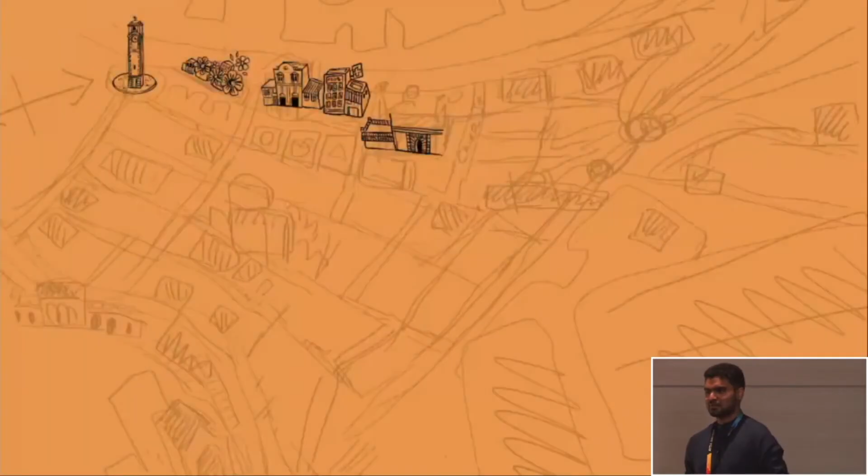Today I want to share a story of hope and possibility from the city I come from, a place called Pettah.

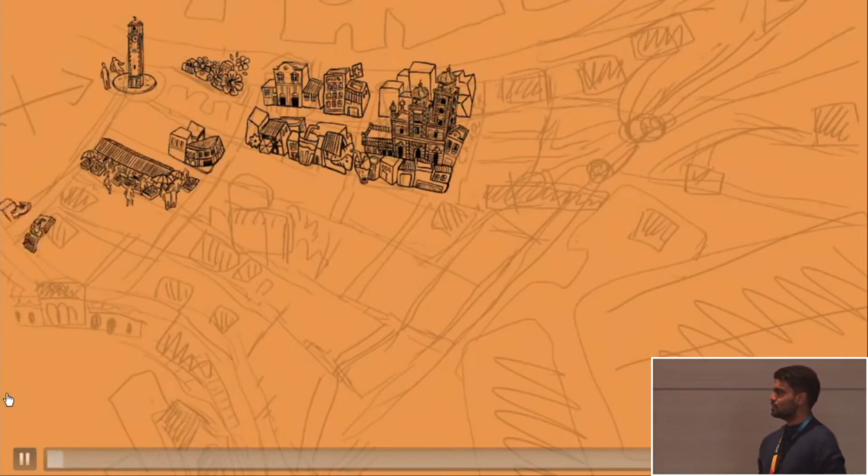Pettah is a vibrant commercial hub in Colombo, Sri Lanka, bustling with energy, a maze of colorful markets. Most importantly, it consists of people of over 20 ethnicities living and weaving through the crowds, which makes this place rich in heritage, culture, and celebration. It's not just a marketplace, it's a living, breathing mosaic of diversity.

But today, this vibrancy is under threat. Markets are being dismantled, and the street vendors, the lifeblood of Pettah, are being displaced to accommodate new developments. The spirit of this city is slowly fading.

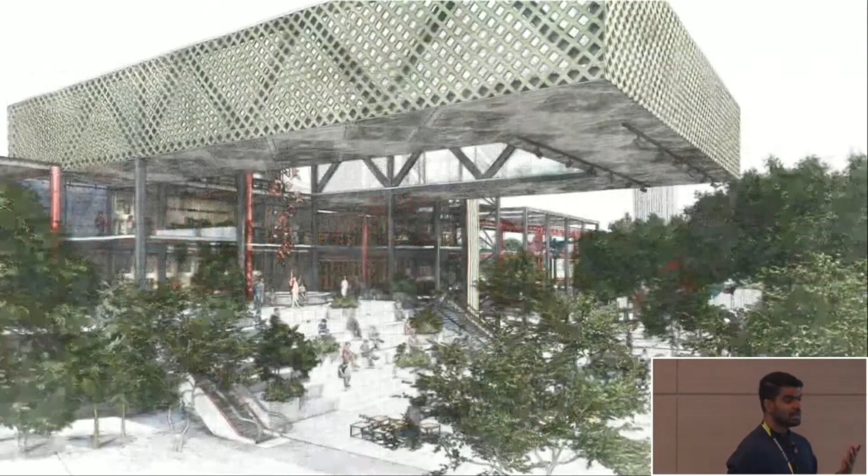So let me introduce you to Pettah Link, a vision where growth does not mean displacement, but a space for everyone, where the formal and informal, old and new, are not pushed apart but thoughtfully integrated.

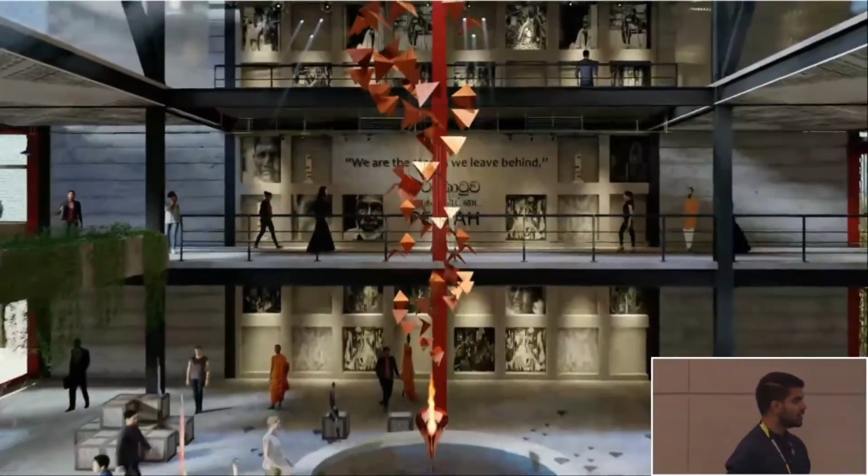3 principles inform this design: social integration to link between different communities, social inclusion to make people feel valued and respected, and social assimilation to allow people to share their aspirations and their identities, all of which are converged through the celebration of the spirit.

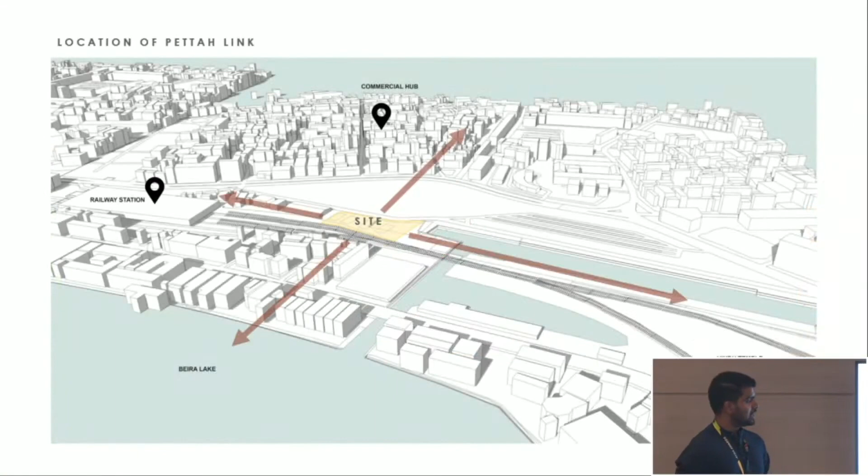The site is an underutilized space which disconnects the commercial hub as well as the lakefront with other transportation hubs and cultural hubs. The spatial movement is informed by the movement of the people itself.

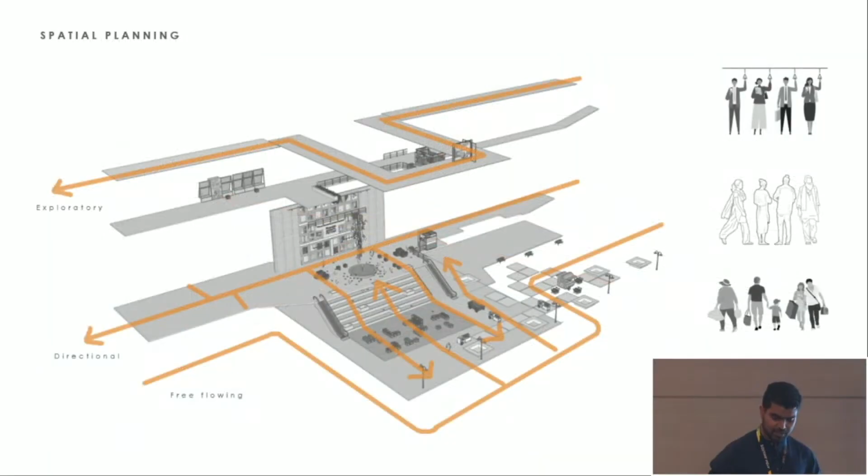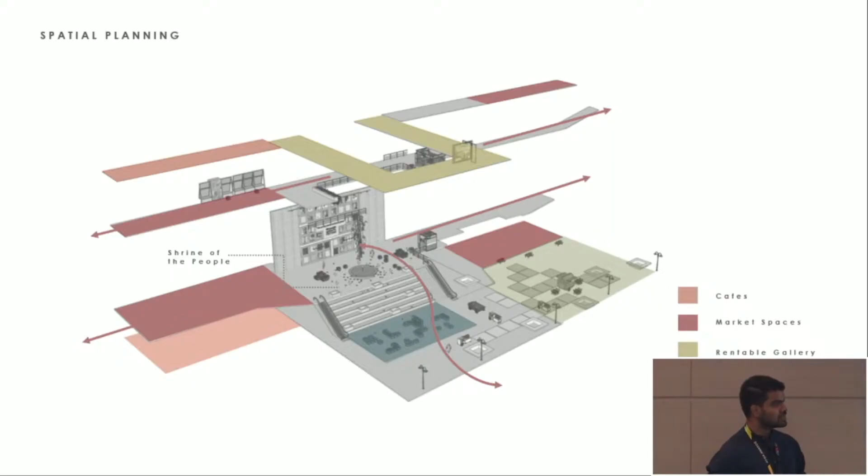To enhance this movement, different functions ranging from commercial activities, gathering spaces, multifunctional spaces, and galleries are introduced, offering diversified activities for multiple users.

And to make people feel familiar within the interior spaces, the theater of the city, or the spirit of the city, has been choreographed into the interior spaces, so it instills a sense of belonging.

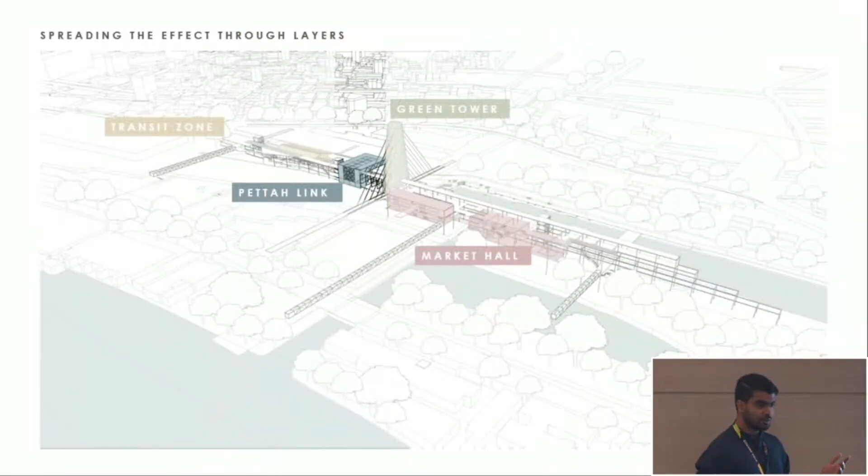And this effect, through layers, is aimed to be dispersed into the surrounding context, with the use of secondary functions such as commercial activities and transitional zones.

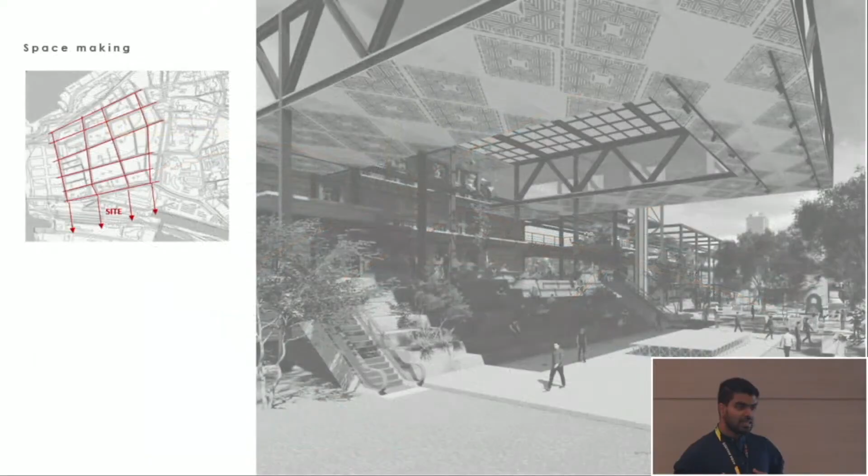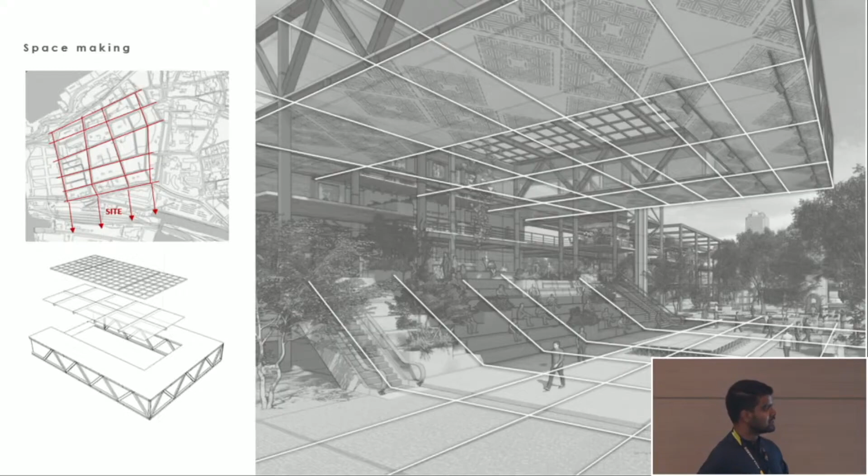The base of the interior design was informed by the historic grid pattern that runs across the Pettah city. This grid pattern was also represented in the transparent ceiling, so that it casts different shadows and allows people to experience this grid nature in different ambiances throughout the day.

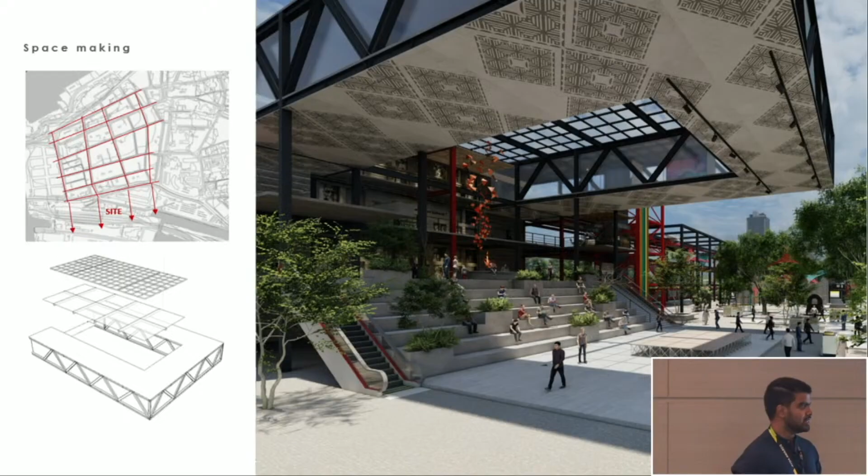Let me take you through the interior spaces. The circulation areas guide people across spaces, and the aim was to bring the street character into the interior space. With the use of stone paving, the aim was to create a connection towards the historic textured pathways of Pettah city, and by using discarded billboards of the market space, a vibrant ceiling has been created, energizing the space.

And the color red has been used to color the steel column and beam structure, which informs directionality and movement to the people.

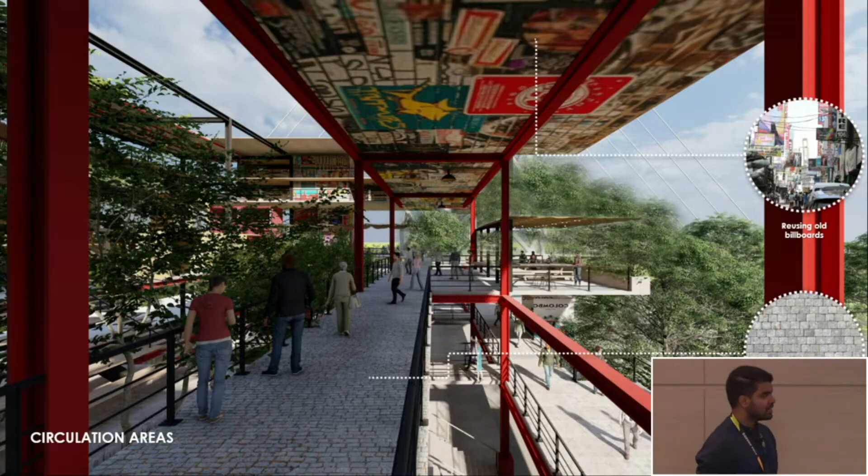And to make these spaces more lively, convertible stalls have been introduced. At one point it is a vendor stall for pop-up markets, and at another time it can be converted into seating. This is a timber frame structure which has upcycled gunny bags coated with Nippon epoxy paint as the covering.

Also the Pettah market energy has been represented through artistic artworks, which brings more vibrancy to the space.

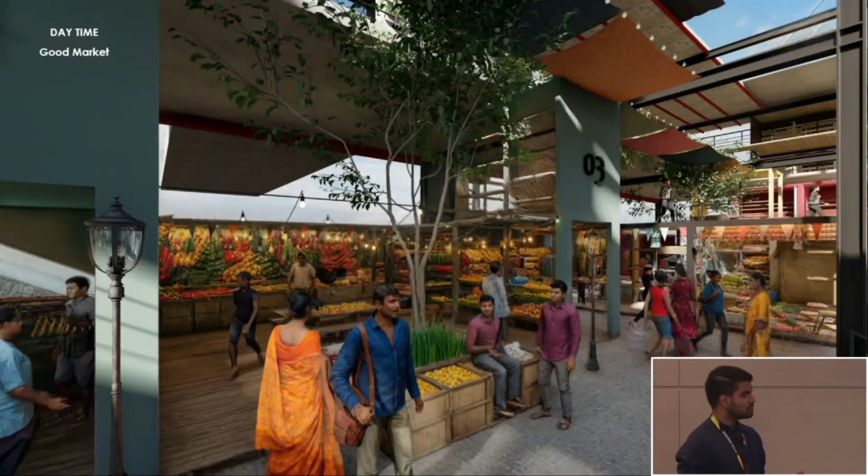Let me take you through the first space, the market space. The market supports and integrates the displaced informal economies.

It consists of 5 modules, making the market a modular market, and the 5 modules allow vendors to promote their products in diversified ways. With the use of 4 vibrant Nippon Paint colors, it follows a clustering of products based on color, bringing the Pettah market energy with colors into the space.

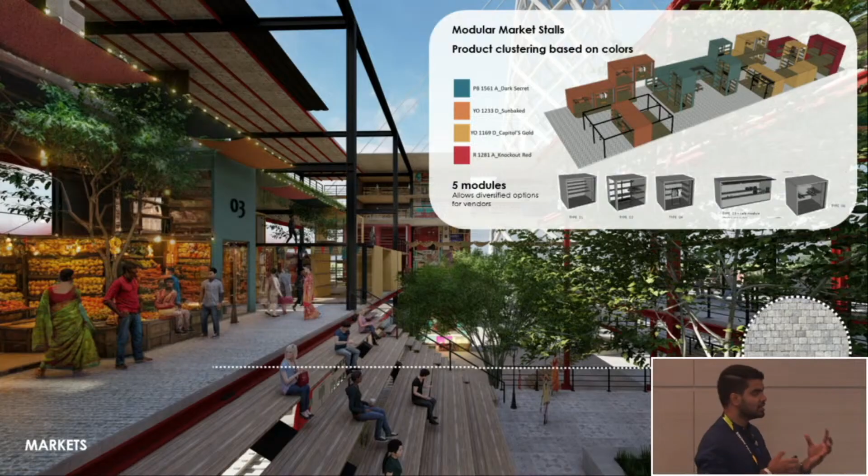During the daytime, this functions as a good market where vendors can come and sell local produce. Packaging boxes are remodeled as seating, and discarded gunny bags are dyed with color and used as vibrant overhangs, bringing a memory of the Pettah market into this space.

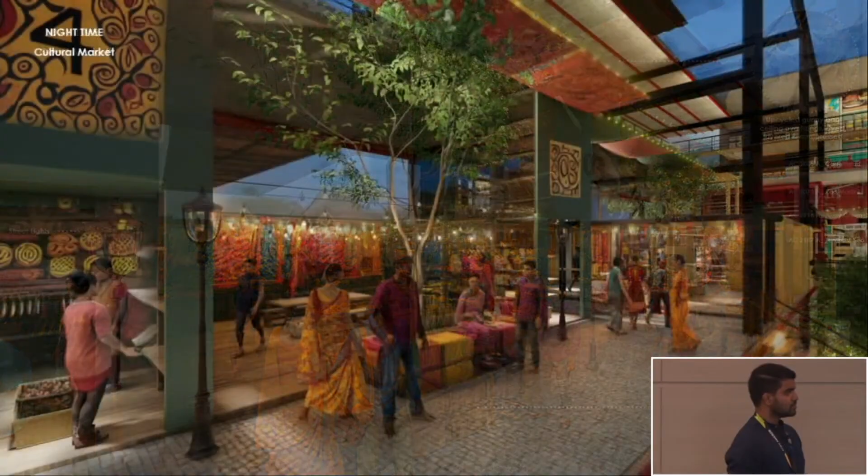And with the use of street lighting and textured pathway, the street character is transformed into the interior space. At night, this transforms into a cultural market where the local community comes to promote their culture through commercial activity, attracting tourists and activating the nightlife of this space.

So next, the gallery space. The gallery space utilizes a light box ceiling with luminous textile panel, which can change the ambience of the interior space to accommodate different community exhibitions.

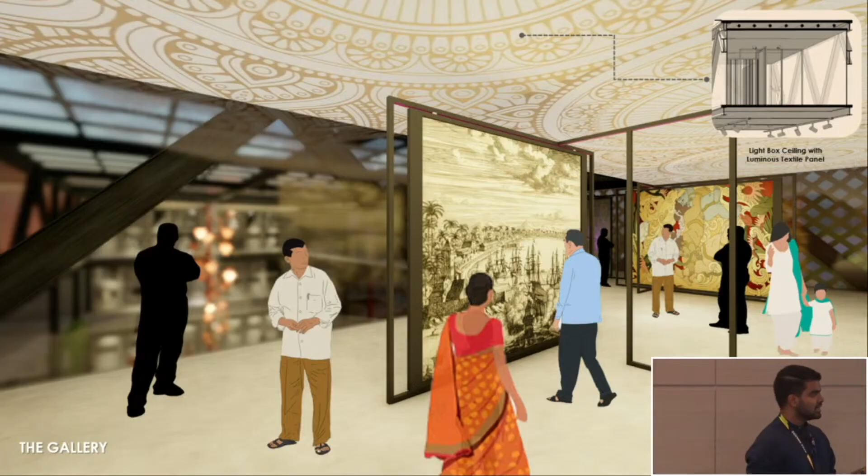And with a screen which filters light into the space, it creates light and shadows within the space to create a dynamic effect in the daytime.

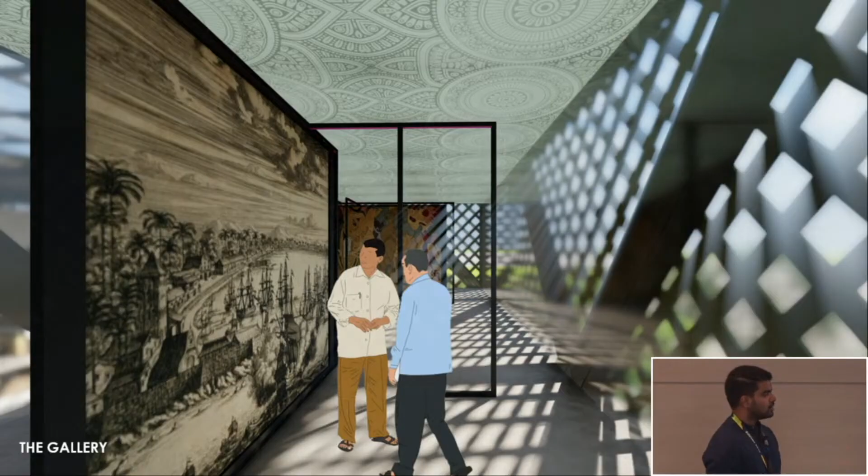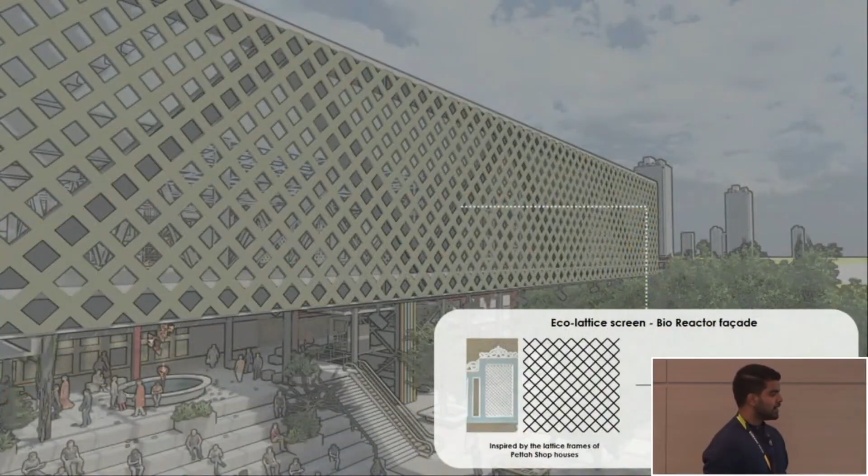And in the night, with the illumination of the light box, you can see the people's movement in a layered format through the screen. This screen was inspired by the historic lattice screens of old shop houses of Pettah.

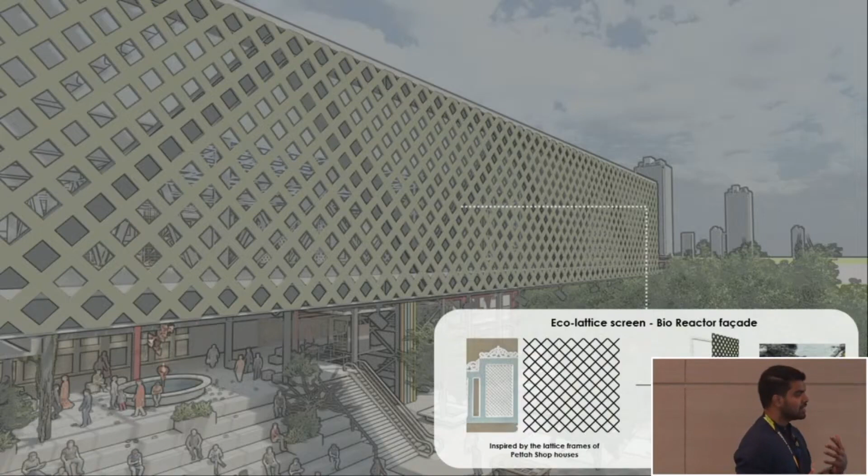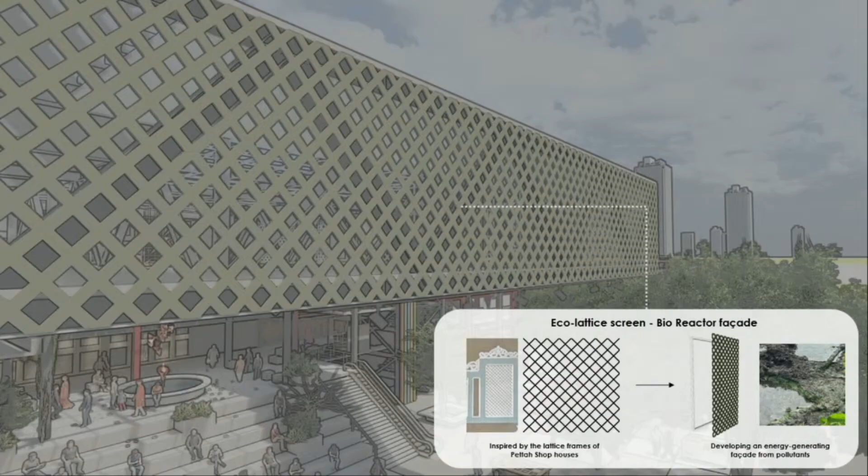Instead of making it a mere screen, it was developed as a bioreactor facade, where the material is a Teflon tubular system that runs the pollutant algae from the lake nearby. This can harness energy with the use of sunlight and generate electricity. So it showcases how a structure, a mere screen, can be given more purpose, and how a negative aspect like a pollutant can be converted into an asset.

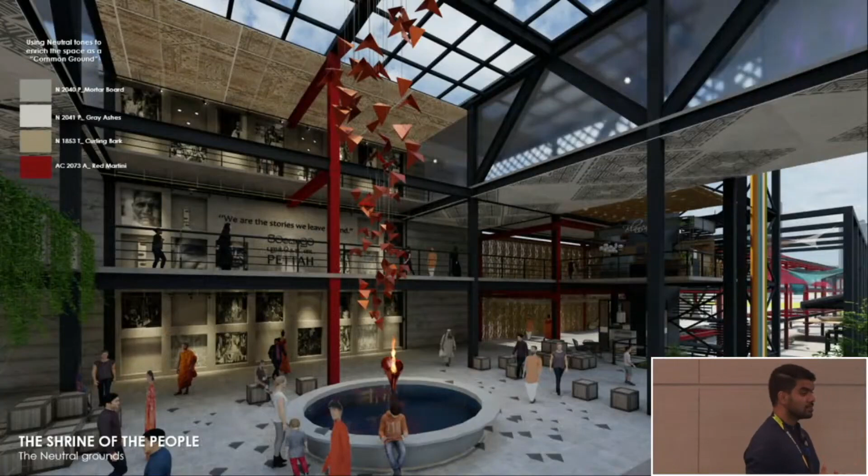So all of these spaces converge into a central space, the shrine of the people, or the common ground. To enhance the nature of the common ground, I have used neutral tones so that it allows the vibrancy of the people's activity to be highlighted. And the central sculpture is the highlight of the space, and the memory wall becomes the backdrop to the space.

So the memory wall is a celebration of the community's history, demonstrating how they grew through their past, through the tragedies and their potentials.

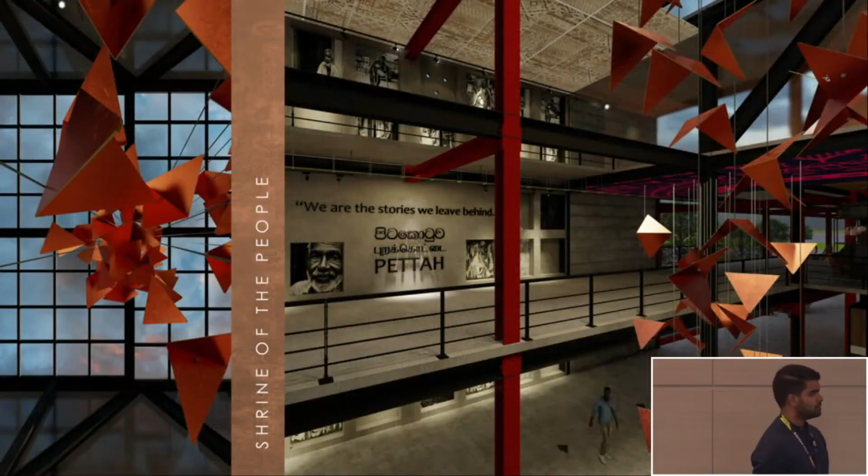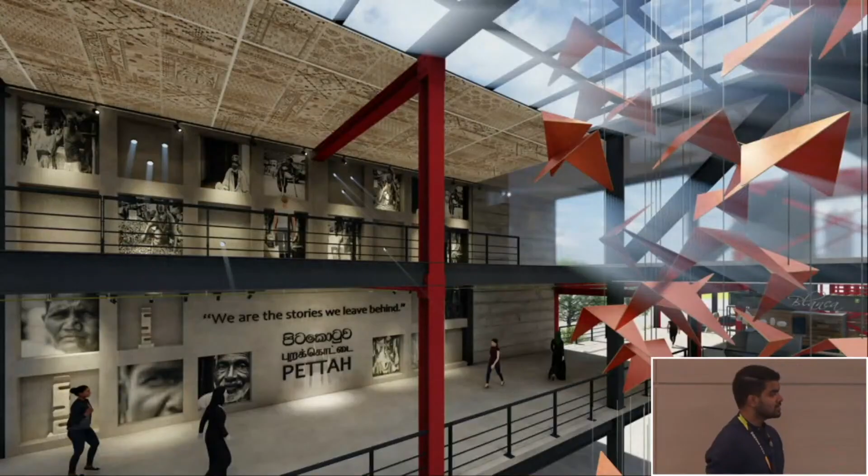And with perforations and pattern ceilings, different ambiances are created due to the light and shadows, and it represents the ever-changing nature of the community, how they adapted and evolved over time.

And the flooring of the gallery spaces above uses discarded old newspaper articles, which actually talk about the tragedies of this community, coated with Nippon epoxy paint. And the ceiling uses a collage of reused gunny bag materials.

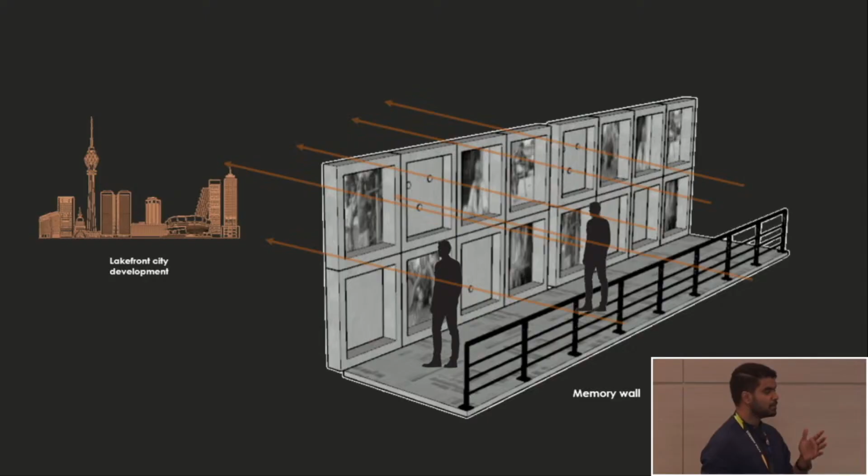And with the perforations in the wall, people can contemplate from this space because they have a glimpse towards the gentrified buildings beyond the walls. So it's a contemplation space between the past, present, and the future.

And the central sculpture is the highlight of the space. It is called Ascend, a flight of unity. It is made out of discarded old train scraps, sourced from the site itself. So it connects to the movements, journeys, and memories of the community as well as the site itself.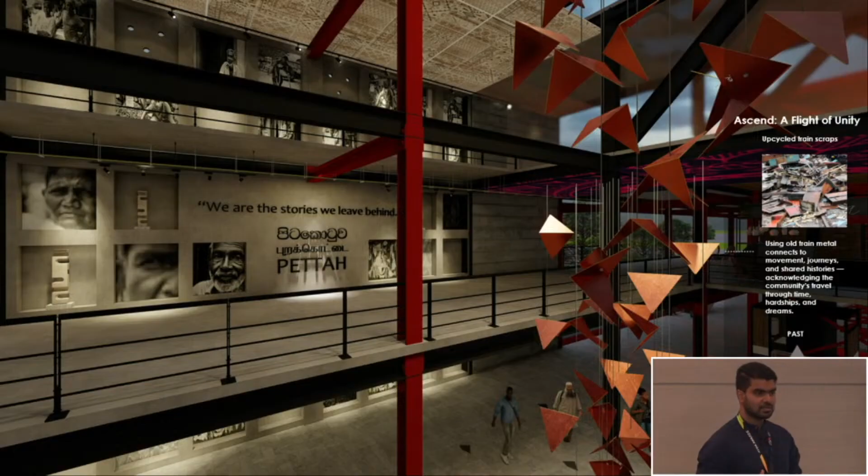And each triangle represents an individual, and the 3 corners represent the 3 phases of an individual's life: the past, present, and the future. And with the use of copper color, it adds more value to the entire composition, showcasing the beauty and value in unity in diversity.

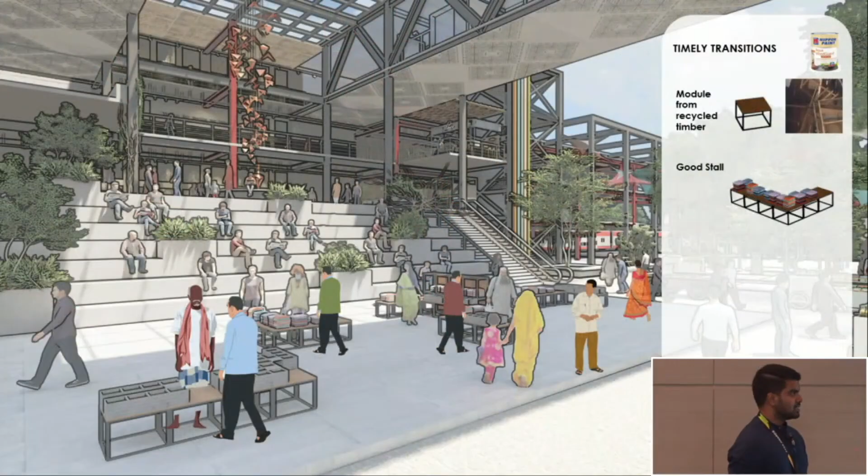And this space flows into a multifunctional space where timely transitions are accommodated. This is achieved by a modular system created out of recycled timber, sourced from the dismantled and displaced market stalls.

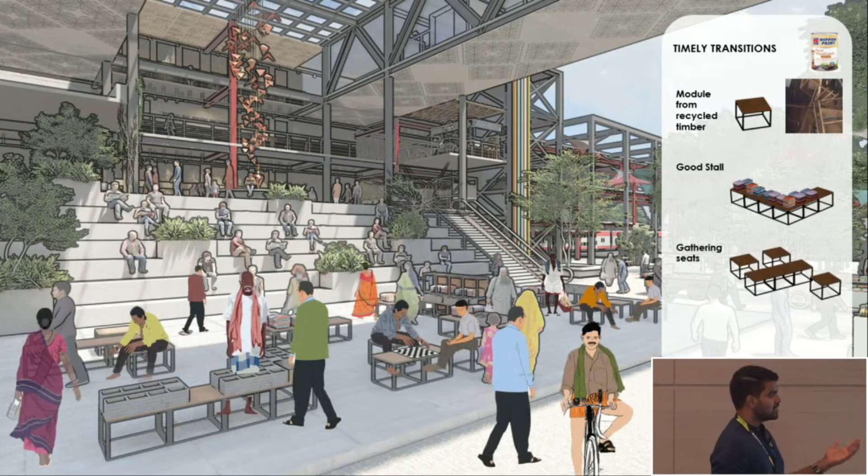During the early hours of the morning, this can be utilized for goods stalls by vendors. And when the intensity increases during late morning hours, some can be utilized as gathering seats and some to add more market spaces. And during the night or in evenings, it can be combined to form a stage set where the local community can come and perform their street dramas and cultural performances.

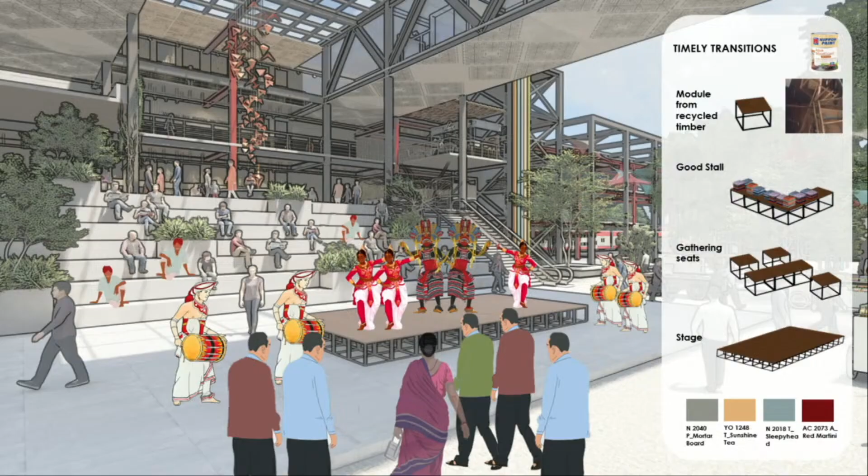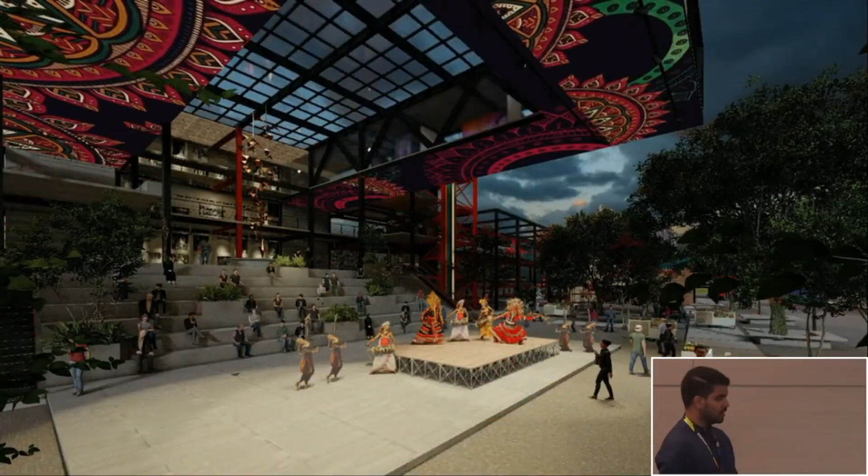Through the entertainment aspect, it creates a deeper emotional connection between different communities. And also this transformative nature allows different festivals of the communities to be celebrated within this space.

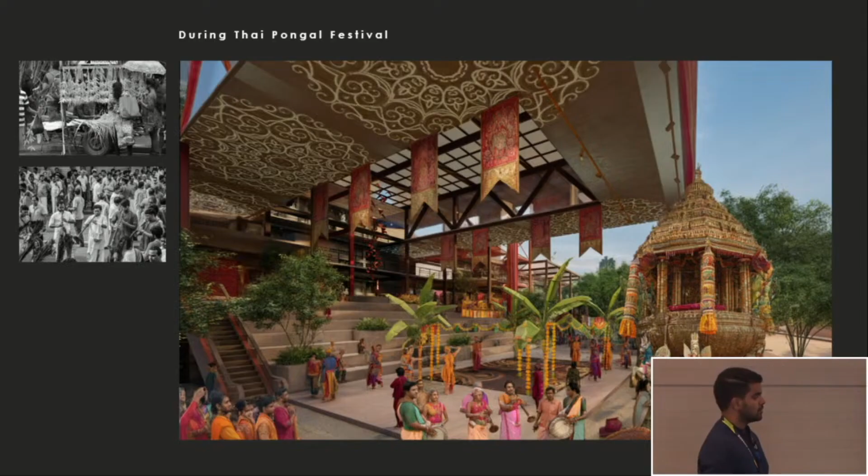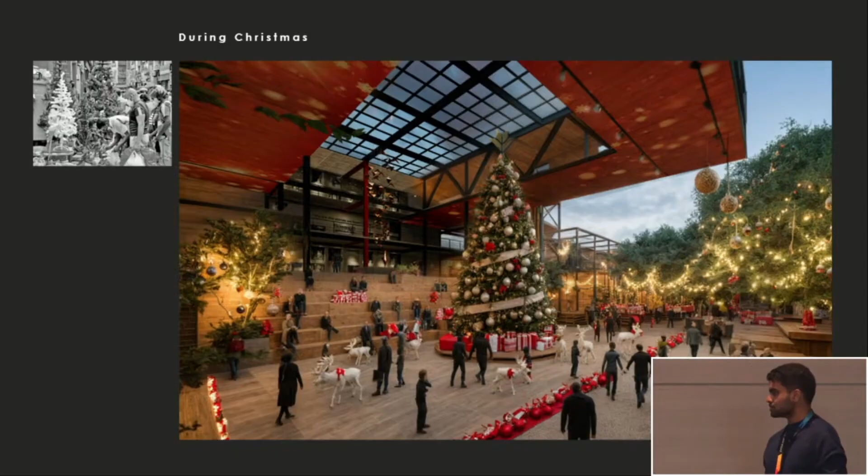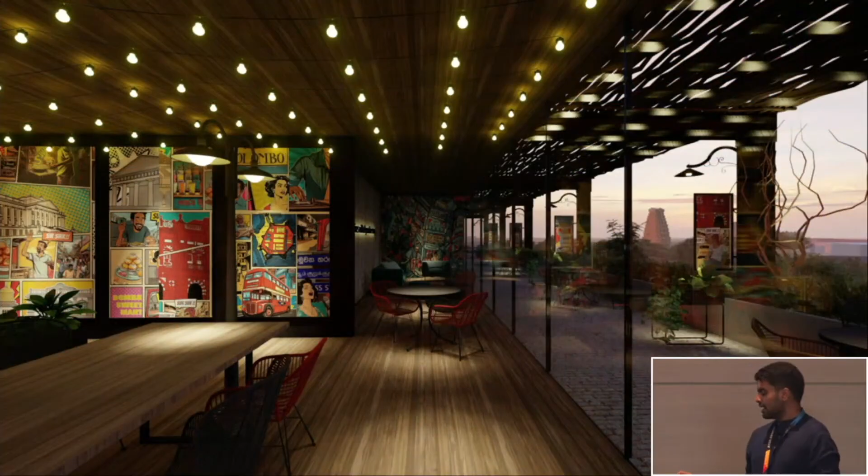And also the Pettah's energy, the market energy, is also artistically interpreted by young artists, and these artworks have been utilized in exclusive spaces such as restaurants as wall panels, and also by giving in temporary seating, street lighting, as well as textured flooring. The aim was to bring in the emotions of the community into the space, as well as the emotions of the Pettah market as a place into the interior, all while having a contemplation with the views of the city.

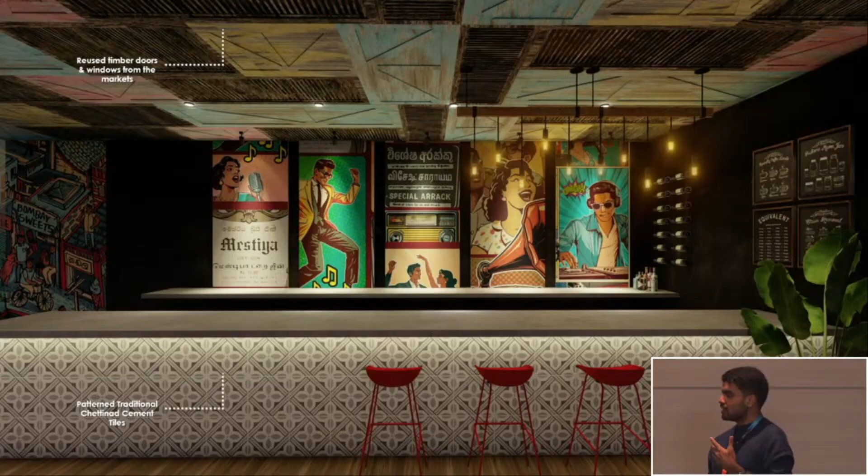And this is another space, a bar space, where it utilizes a particular tile which is called Chettinad tile, and it is a representation of the Chettiar community of Pettah, a historic community which lived in Pettah.

So this shows how the transformative nature and the celebrative nature gives more meaning to, and how impactful convergence is. And by connecting all of the people, irrespective of their nature, this becomes more than a design. It is a response to instill a sense of belonging. And it not only achieves the three principles, but ensures that it connects with the local ecology and its sustainability.

Pettah Link reclaims a void, not just in land, but in society. It transforms a place of exclusion into a vibrant space of gathering, dignity, and identity. In a place shaped by more and more gentrification, where modern spaces replace people and culture is curated for the privileged, this is a space that belongs to everyone.

By creating spaces that honor day-to-day cultural practices, people start beginning to see themselves within the space and in each other. Because when we honor what we already share, our music, culture, values, aspirations, we create not just a place, we create a deeper emotional connection.

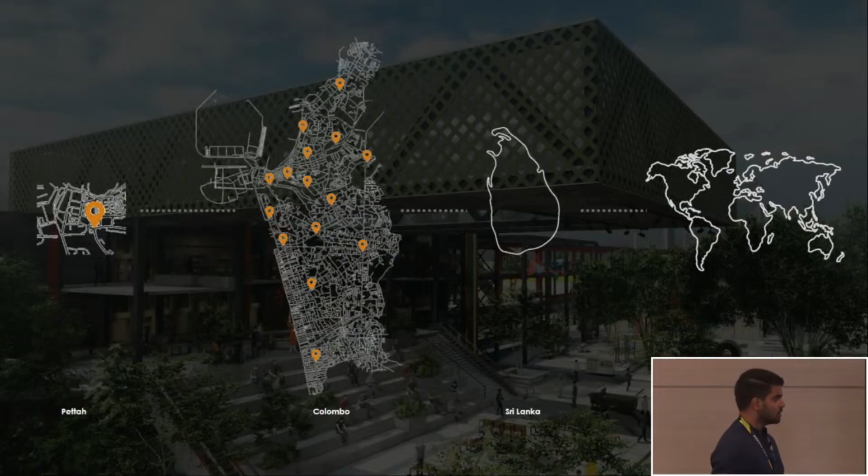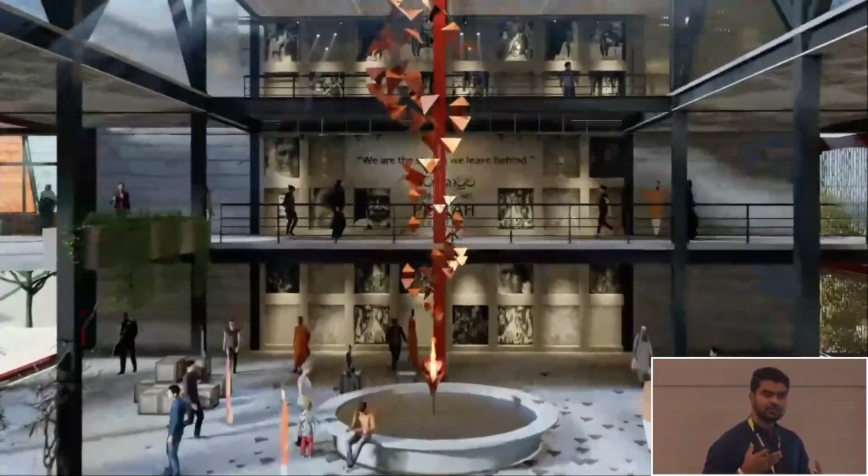So, Pettah Link shows how we as designers can center people, their values and aspirations, and inform a new kind of future for the spaces we create for our communities in similar cities. A future that includes everyone.

So, to all of Pettah and to all in the world, Pettah Link.